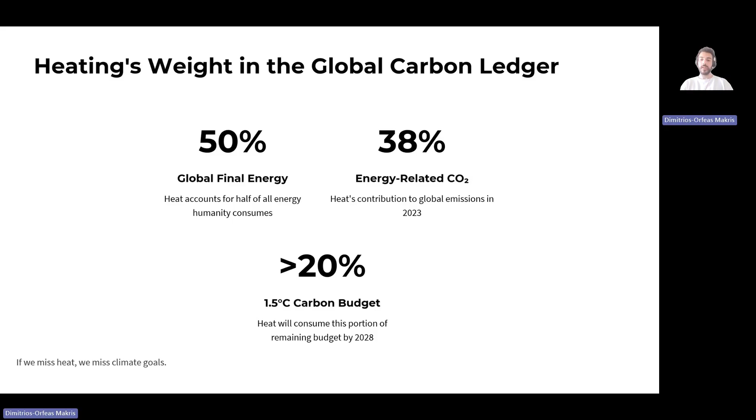At today's pace, the heating sector alone emits 14 gigatons of CO2 every year. This means that over the 6 years of 2023 to 2028, that adds up to 84 gigatons of CO2, almost 1/3 of the entire budget. If we fail to decarbonize heat, we miss our climate goals.

Now, where does that enormous heat demand actually come from? Buildings and industry are two totally different stories. Even though both demands cover a similar percentage of the global final energy, the amount of heat consumed in buildings is huge and dominantly low temperature. On the other hand, industry covers a wider temperature spectrum up to 1700 degrees Celsius.

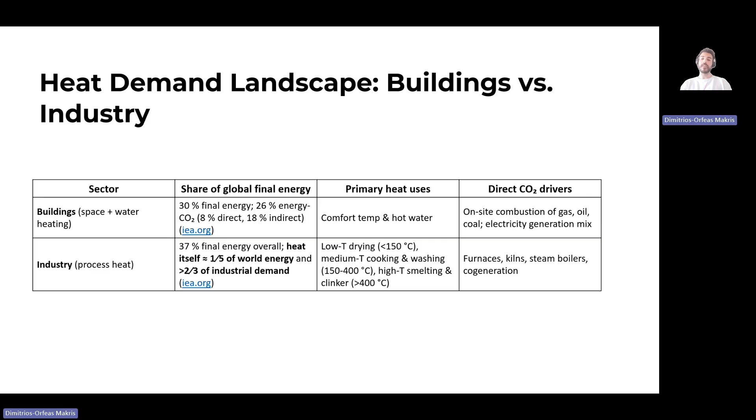The physics of each temperature bracket dictates which conventional technology is used. If we're not talking about a district heating system, then on-site combustion occurs in the building sector, while large-scale technologies such as cogeneration and steam boilers occur for the industry.

Next, what fuels feed this thermal appetite? Fossil fuels still supply 2/3 of building heating energy, mainly natural gas. Natural gas alone covers 42% of building heat demand worldwide. This is 60% in the US, around 40% in the EU, and around 20% in China. In China, direct coal use in buildings is still around 18%. Coal is also above 80% of fuel in North Asian district heat networks.

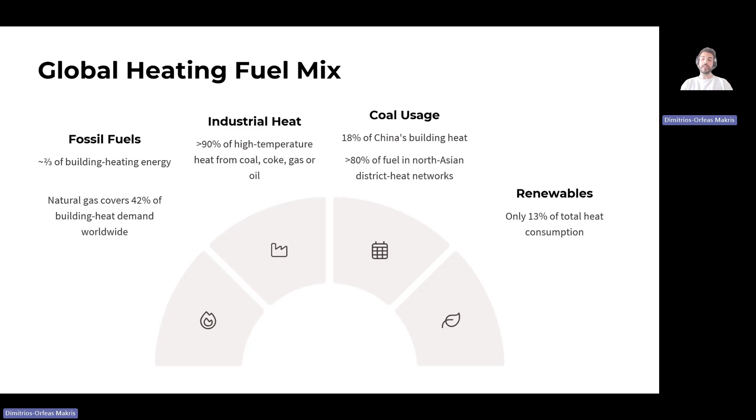Across global industry, over 90% of high temperature heat comes from coal, gas, oil, or coke. According to IEA industry tracking, modern renewables, biomass, geothermal, solar thermal, and electrified heat are only 13% of total heat consumption.

Having mapped fuels, let's drill into the hardware that converts them into useful heat, starting with buildings. This table shows the main ways homes stay warm today. Starting with the gas boiler family. On the one hand, we have the non-condensing, an old standard that wastes flue heat, so it tops out around 80% seasonal efficiency. On the other hand, the condensing has the same fuel but captures that water vapor heat, nudging

efficiency into the mid-90s. The condensing options save 10 to 15% gas and emit a bit less CO2, but both still burn fossil gas, so they buy us time, not the final answer. Moving on to oil boilers, they live mostly in off-grid rural areas, while coal stoves linger in parts of Eastern Europe and rural Asia. Both carry the highest carbon and air pollution footprint in the table, and this is why oftentimes policies first target transition from coal and oil.

Moving to non-combustion options, electric resistance heaters have a near perfect on-site efficiency, but their climate impact is directly linked to the grid mix. If there's a coal-heavy grid, then it can be worse than a gas boiler. If a renewable energy source rich grid exists, they instantly become net zero. Usually, electric heaters team up with storage options, but this is for a later stage of the course.

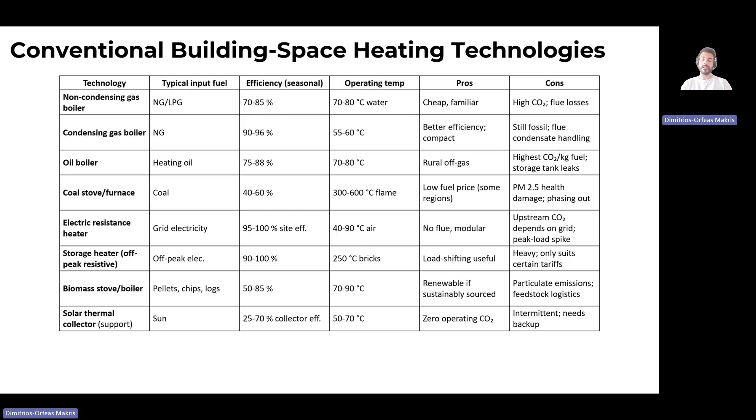Space heating is half the building story. Water heating follows similar but not identical patterns. A typical household allocates 12% of total energy to hot water, up to 25% in warm climates where space heat is minimal.

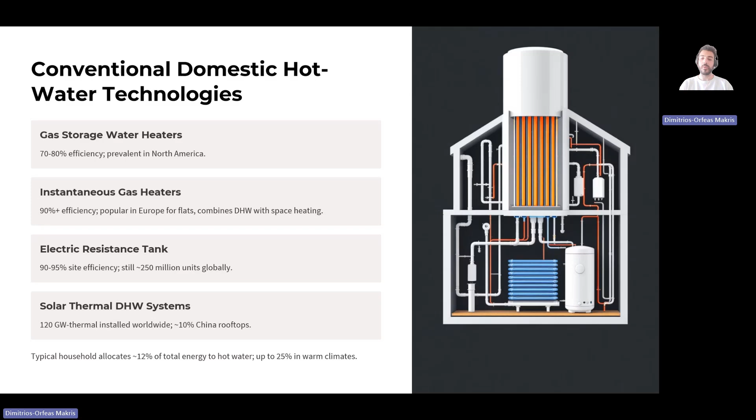Thus, domestic hot water is an often overlooked decarb lever. In terms of technologies, similar solutions seem to exist for the domestic hot water needs.

Now shifting from homes to factories. Industrial process heat makes residential heat at the high temperature end seem insignificant. This slide splits industrial heat into four temperature bands, each with typical equipment and fuels. Think of it as a ladder. The higher the temperature, the fewer the decarbonization options. And as we will see, the bigger the carbon footprint.

On the first line, we have food factories, paper mills, and breweries that just need hot water or low pressure steam. They burn mostly natural gas and in some regions biomass chips, and they already sit around 70 to 85% efficiency. Because the temperatures are gentle, we can decarbonize these lines with high temperature heat pumps or electric boilers quite easily. So the carbon urgency here is moderate.

Going to the second line, chemical plants, textile dyeing, pharmaceutical dryers, they still rely on gas and fuel oil, but the higher pressure starts squeezing out heat pump options. This band is bigger, roughly 1/6 of all industrial heat, but still manageable with today's electrification technology if the policy incentives line up.

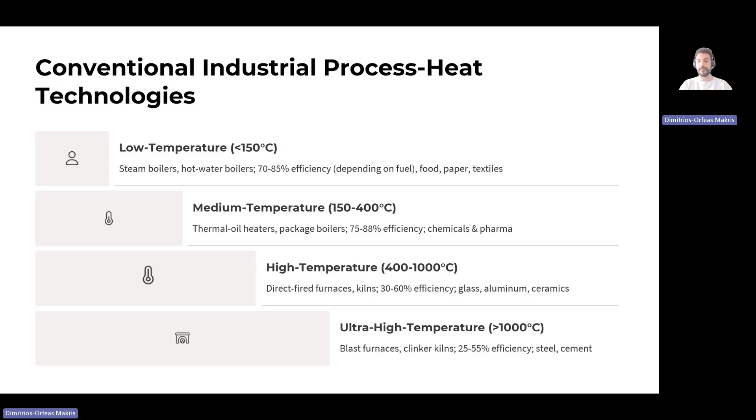Most homes are heated one by one, but in about a tenth of the world's buildings, the warmth arrives through a giant central radiator called district heat. Think of it as a city-scale kettle that sends hot water or sometimes steam through an underground loop and lets every building tap in through a heat exchanger.

How does it work? The source is one big boiler house or a combined heat and power plant. Pipes are heavily insulated supply and return mains, like the arteries of the system. Buildings take the heat they need, then the cooler water heads back for reheating. District networks cover about 9% of building heat worldwide, but the map is patchy.

Fuel mix today is still heavily fossil. In China and much of Eastern Europe, more than 80% of the heat in these pipes comes from coal-fired CHP. In Western Europe, it's a blend of gas, biomass, waste to energy, and a splash of large heat pumps.

So what are the benefits of district heating? Economy of scale. One big efficient plant is simpler to clean up than 10,000 little boilers. Second, flexibility. Swap the fuel at the plant and everyone downstream decarbonizes overnight. No plumbers in people's kitchens. However, they have some heat losses. Even well-insulated pipes concede 5 to 25% of the energy before it reaches customers.

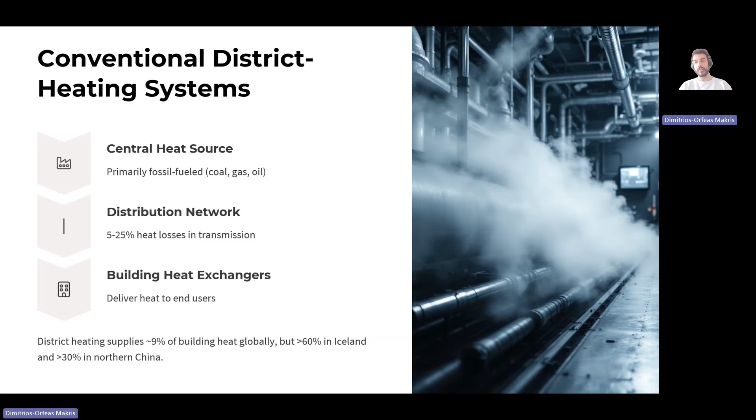So, picture district heat as a giant vessel. If we cool the water down, patch the leaks, and change what's burning in the plant, we can turn that vessel into a clean heat backbone. That's exactly the kind of story we will tell in some later presentations.

Now, heat is half of humanity's energy diet and close to 40% of our CO2. Ignore it and we miss every climate target. Most of that heat still comes from combustion technologies that can get much cleaner. The efficiency ceiling is already in sight. The hottest 10-20% of industrial heat is the carbon heavyweight. Small slice of energy, giant slice of emissions.

Why does that matter? Those facts tell us where to aim our effort. Electrify the low temperature masses quickly and throw the innovation kitchen sink at steel, cement and glass.

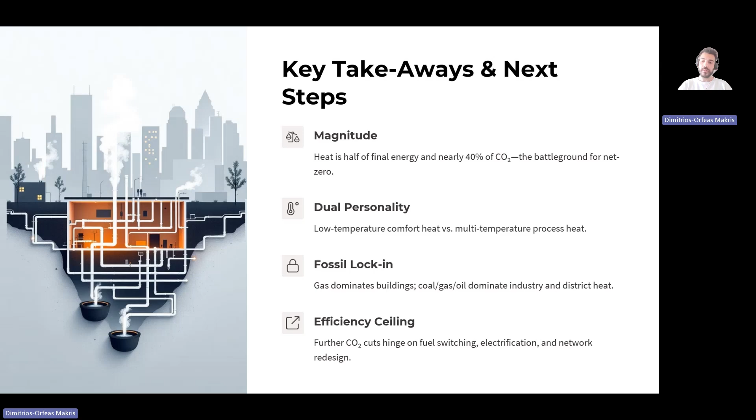In the next session, we will crack open the decarbonization toolbox: heat pumps, electric boilers, green hydrogen, bioheat, efficiency retrofits, smart controls. So we will see in the next presentation how we can decarbonize the heating sector and what are the upcoming technologies.